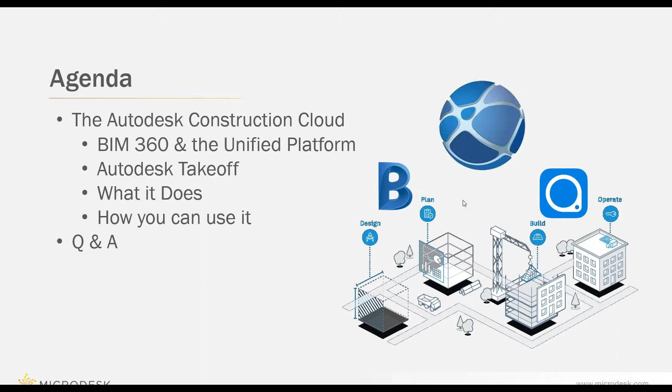Now, in terms of the Autodesk Construction Cloud, that is the overarching title for all of Autodesk's cloud services. So up until about a month or two ago, that was BIM 360, PlanGrid, Building Connected, Assemble, Pype, and the Autodesk Construction Cloud Connect.

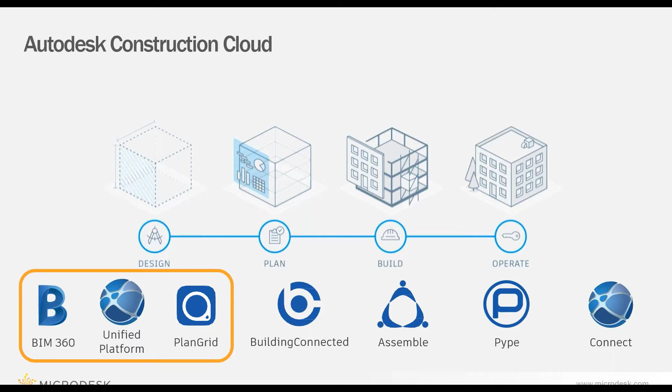Now, last month, Autodesk released the Unified Platform, which is essentially a merger of the main functions of both BIM 360 and PlanGrid. So the idea is we're unifying the different aspects of the construction cloud, rather than having separate tools to do things, to make one thing that covers all the bases.

So you've got BIM 360 Coordinate, which is now Autodesk BIM Collaborate. BIM 360 Design is now referred to as BIM Collaborate Pro. And then you have Build. And then the new one that we're going to be talking about today is Takeoff.

So when we're talking about the Unified Platform, all of these components, similar to BIM 360, have their consistent common data environment. That's going to be the Docs component, our document management, putting our content in a consistent location that's available from just about anywhere. It allows us to do our issues, markups, and file sharing.

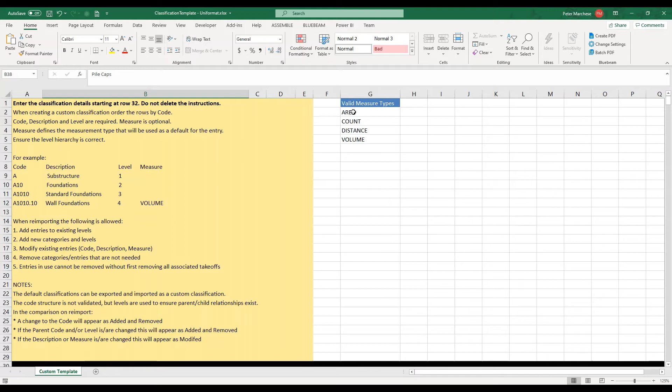This is something I can import via an Excel spreadsheet. In this case, this is the template I started off with from Autodesk. They make it easy to work with. The first part tells you all the information you need to know, how it needs to be formatted, and what information goes where. If you're putting in a specific measurement, this is what you can choose from.

You can basically set this up however you feel. What's the organization you want? Do you want to go CSI, or do you want to go Uniformat? This is up to you. How do I want to break down everything I'll be doing my takeoffs on? Is it a really simple project where I just need five items, or do I want a structure where I can expand a tree out and break it down into various discrete components?

Once I've determined how I want to work on this, I'll upload that here to Autodesk Takeoff. And if I need to track multiple things, I can add an additional classification system to the items that I count. I'll go over more about what this means in a few minutes.

So that's my first thing. I've got all my projects set up. Then I come in here and determine what's my measurement system, and how I'm classifying my data.

Now from there, I need to make sure I actually have data to work with. So I can come over here to my files. This is essentially going to show me the content I was looking at before inside of the Docs component, inside of my document management.

Now for 2D content, I can look at those PDFs I showed you before in my documents folder. So this is my 2D PDF. I can check the box for the content I want, then come over here and say publish to Takeoff sheets and models. That's one way I can take my PDFs already inside of the Autodesk Docs component and bring them straight into my Takeoff.

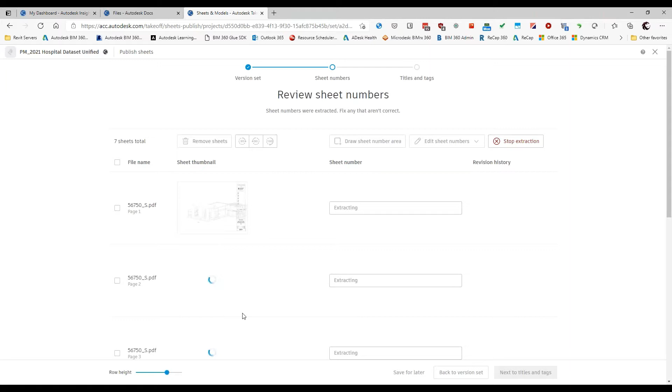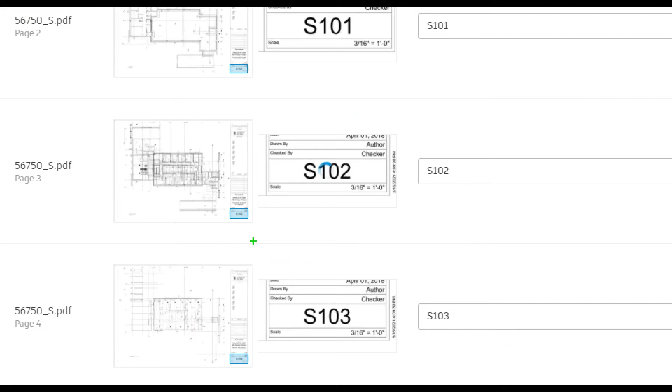Once this is finished, I can look through here and see where it's actually getting the data. All the numbers line up with the examples I have there. Then I'll say I want to go to the next page once it finishes syncing. Then I get to choose, okay, you've got the number, but what about the title? Where's that? You can see this little blue square here that it actually chose automatically. I can go into that title block and draw the box where my title is, and it'll pull that information out for me.

And then from that point, it'll pull in that PDF, and I can start utilizing that for my takeoffs. Now, just to speed things up, I'm going to cancel this for the time being because I've already got some content in there to work with.

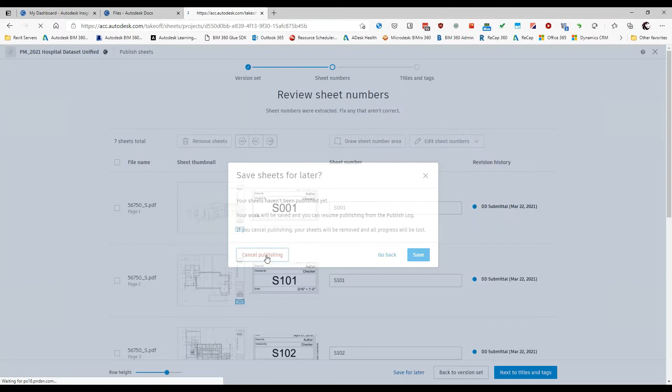So in this case, I've got my sheets and models. Those were sheets that were published from the docs component. Now for my 3D models, I do have to manually upload those. So in that case, what I'll end up doing is I'll download my project from the Construction Cloud, or just upload it from my local files if I'm only working locally.

Once my content is uploaded, I can come over here and now I can create my package. So pretty quickly, go in, do my settings. Am I doing Imperial? What am I classifying things as? Upload your content and then create the package. And that package is essentially how am I going to organize all my data together. So this is my DD review.

And I can see, again, all those views, whether they're 3D or 2D, right here to work with. Now, in this case, I've got a good amount of content. And if I'm trying to figure out, okay, well, where did we leave off? I can always click on my filter and say, you know what, I only want to see 3D views, or maybe only show me my 2D views, or just show me the views that actually have takeoffs already. In this case, I can see that I've already put a takeoff here on my sheet for A102, as well as on some of my models.

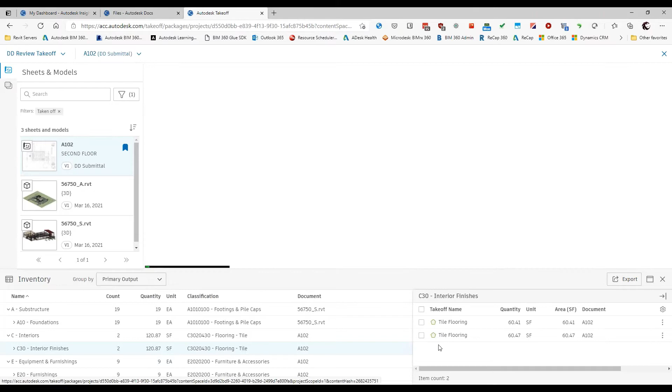On the bottom left-hand corner, I have a little icon here for my inventory. So I can also come through here and see all the things that have already been taken off. And by clicking on elements, I can say, you know what, take me to where that is. So same idea as me coming over here to 102 and clicking on that. I clicked on my tiled flooring, and that opened up the view and took me right to where that tile flooring is. So I've got a couple of ways to filter my views and make sure I'm finding what it is that I'm looking for.

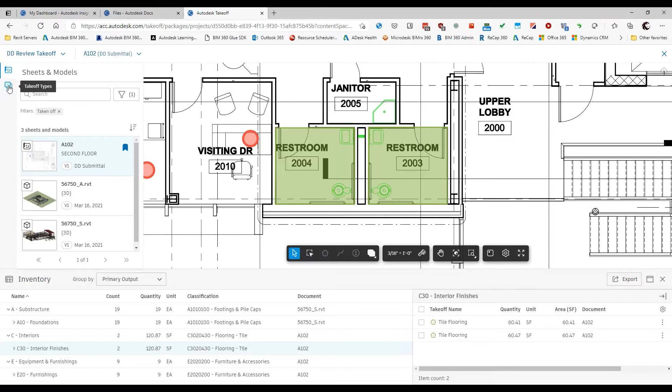So now that I've got my view set up, I can see where I am. I'm just going to turn off my mini map for a minute. I'm going to come over here and I'm going to change my view on the upper left-hand corner to my takeoff types. So rather than looking at my views, I want to look at what's currently taken off. And at this point, I've got a few things. I've got my office desk and my tile flooring.

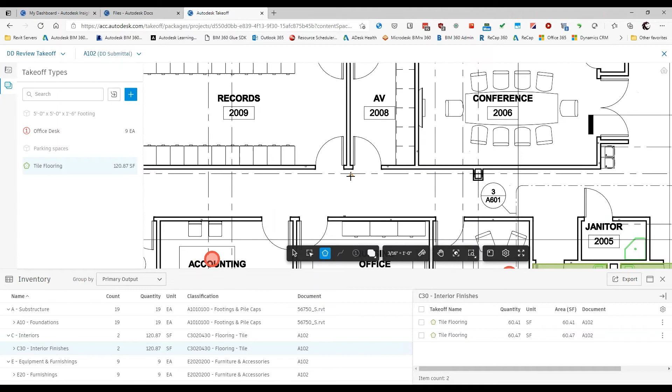Now, if I click on my tile flooring, what that's actually doing is it's allowing me to create more of this specific thing. It automatically went down here to creating areas. So let's say I realize that, you know what, we need to put tile flooring in the janitor's closet too. So this is actually going to snap to the corners. And as I'm adding that, my numbers are growing up. I'm seeing that there's more content that's in here. So I can keep adding more things.

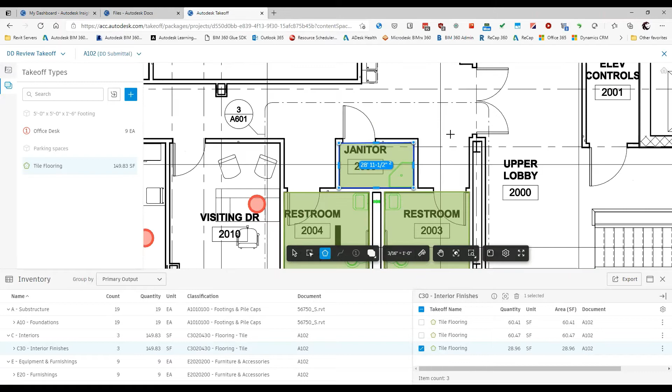Now, if what I need to do is I realize that, oh, I made a change to something, I need to start counting more things. Perfect, go to my office desk. Just keep clicking. If I realize, oh, yep, nope, that's actually wrong, I got to fix that. Nothing here is locked in stone. I can always click on it. I can move them. I can remove them one at a time. I can also come over here and actually find those elements and make changes.

So let me go to my furnishings. I can see as each one of these I select, it highlights it. I'm just going to grab a couple of these and tell it that, yeah, you know what, those ones are extra, I don't need that. So I can make modifications and delete them as need be.

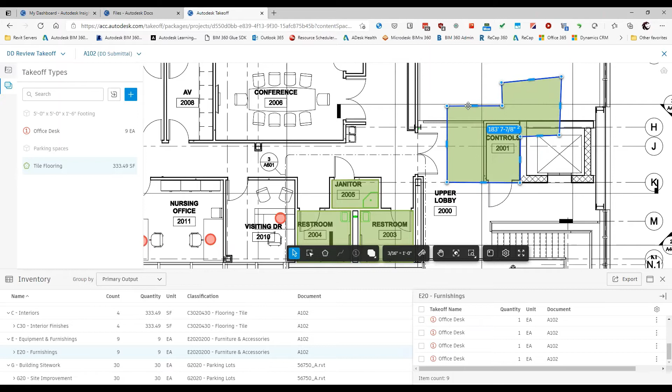The other thing I can do is, let's say that I have something like this where I want to actually have an opening in it, or I need to have some weird shapes. So let's say I have this here, and then I have another one that overlaps it. So this makes it very easy. I can actually select multiple elements and tell it that I want to combine those. I can always come in here and actually manipulate them after the fact. If I have a dot there that I don't need, I can actually remove the vertex. Same idea, let's say that I want to actually get rid of the space here. And I can apply that as a cutout.

There we go. And essentially, that will actually cut that space out. And the other thing I can do is if I realize that I don't want that to actually be an opening anymore, I want it to be filled in.

You can right click on it and remove it as well. So you have several items in there that you can modify as need be. You're not locked into any one thing. You can tweak it, remove it, edit it as need be, so you have a lot of flexibility in terms of how you do your markups.

Now I'm working with a markup that already exists, so what I'm actually going to do is create a brand new one. I'm going to go over here, hit the plus symbol. That allows me to create a brand new takeoff type. So I'm going to come over here and say fire rated wall.

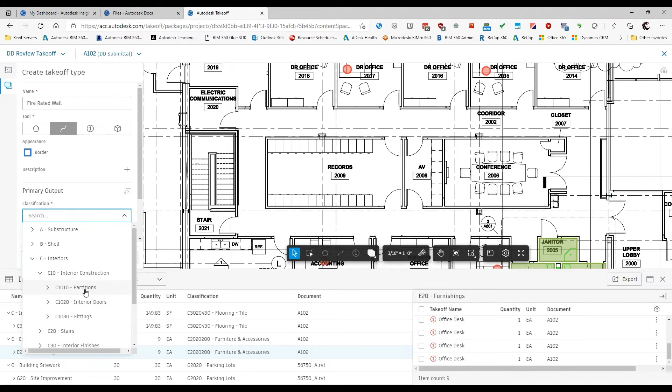And I'm going to do that based on line. I can make changes to my appearance - how do I want this to actually look? I'm going to choose where I want this to actually be organized, so I'll say that's going to be interiors, interior construction. I'll say partitions. How do I want that output to be counted? I'll say linear feet. Start that takeoff.

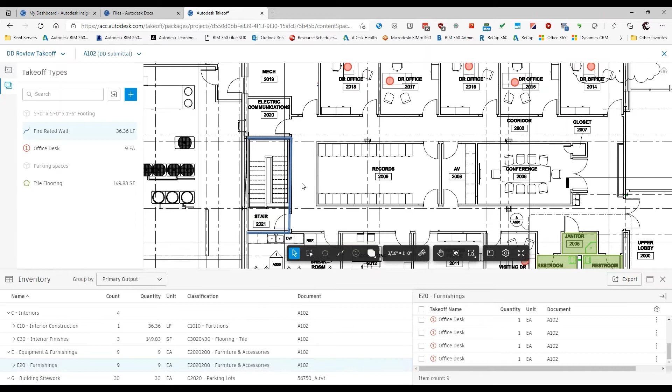And then I can sit here and trace my walls. Again, didn't really draw that clean, so let me come over here and modify that as need be. And I can see that as I'm drawing these lines, that number is actually going up. So I can keep making modifications, tweaking how things work, making changes as need be.

Now let's say when I did this, I actually made a mistake. I can always come in here and make some changes. So if that wasn't the right thing, maybe I started off as count - I can see that now my interior construction is just a count of 2. Well, I'll make a change - that really meant to be linear feet, or meant to be in a different folder. So you're not locked in from that initial choice. I can come back and make changes to the color, as well as to the organization of this.

Now, let's say that in addition to counting this as a wall, I also wanted to count it as something else. What I can do is use that secondary output. So when I was creating what the actual organization was going to be, I'm using UniFormat in this case - I could have added a second organization, and that's where I can actually set this up.

You also have the ability to create formulas. So if I'm measuring something and I want to calculate - I'm using 2D drawings, but I'm looking for volume - in that case I can start saying I want the output to be in volume, but I want the formula to take the length and multiply that by a height and a thickness. So I can put in the math needed to generate the numbers I'm actually looking for.

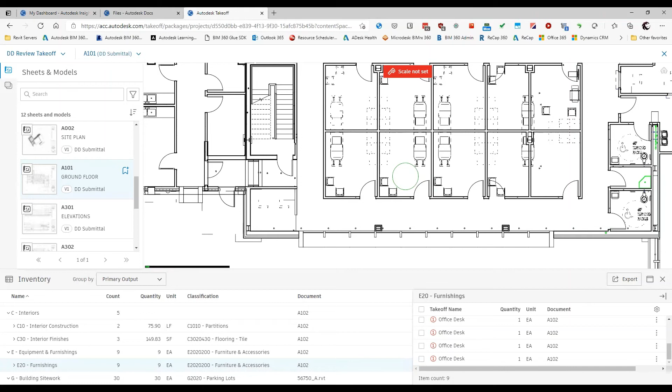Now, you might be wondering, okay, how does this understand what I'm working with? How is it actually able to get these kinds of numbers? Well, the easy thing is, if I get rid of my filter and just grab one of my 2D views, the first thing it needs me to do is actually set the scale of my view. As I'm working with the 2D view, it doesn't necessarily understand what my distances are. So the first step is to come down here and say that from there to there is, in this case, 3 feet.

Set that calibration. Now it tells me what the actual scale is. So if I already knew it to begin with, I can double check it down here. And now I can come down and say, okay, let's start working.

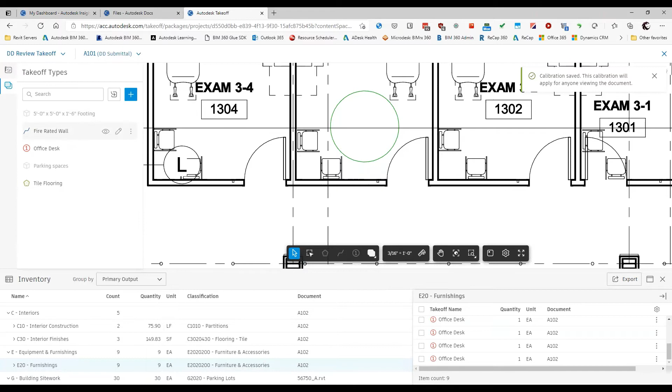So do I want to start doing more tile flooring? Do I want to start using more fire-rated wall, the office desk? I can take advantage of the organization or the different kinds of takeoffs I've already set up, and then start applying them to as many different views as I want. So I don't have to rebuild this every single time I go into another view and start making changes.

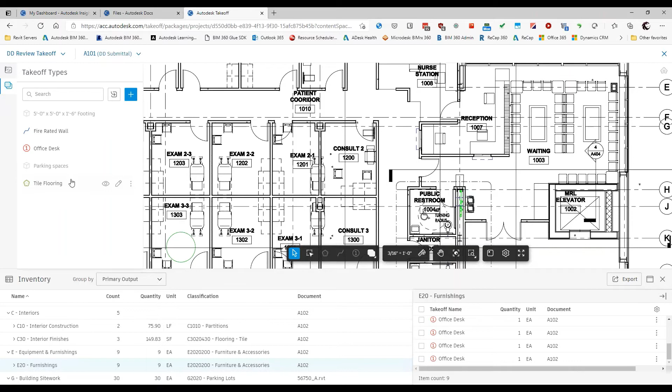So this is how I can take advantage of Takeoff for my 2D views. And again, if anybody has any questions, feel free to drop those into the questions window. Just keeping an eye on there just in case anything pops up.

So I'm going to hop back up here to my sheets and models. Now, up until this point, I've been doing 2D work, which is pretty simple - you click on it, you trace it, you draw what you want. But it's relying on me as a user to interpret the 2D drawing and trace it and assign it correctly. So what I'm actually going to do is go to one of my other views here - the easy thing for me to do is grab my structural model.

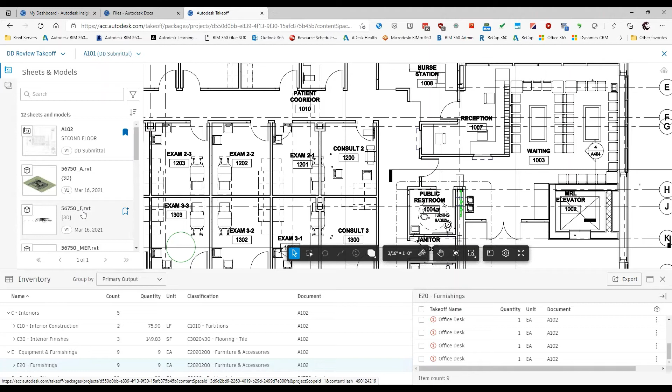And now I can see all the content that's in here. You might notice that a few things look like they have weird colors, and I'm going to get to that in just a minute.

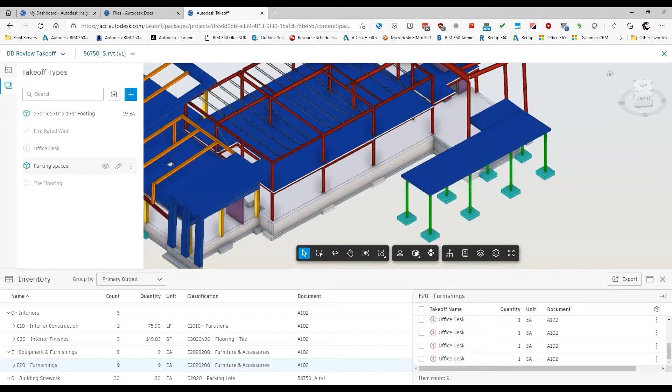Now in this case, I've got some footings that I've taken off, and I've also been counting my parking spaces. Now let's say what I'm really looking for is my columns. So I can click on a column here, and I'm going to say I want to actually count that. I'll hit the plus symbol.

Because I'm selecting an object, it understands what that object is and automatically adds that to the name. So this is going to be looking for W12 by 40. I can choose what color I want it to be, and if I want to, I can also put a description in here.

So Kevin, that question you just asked about inputting what type of wall - if I want to put that data into my takeoff, I can easily put it in either the name or the description. Or if I want to go to that level of detail, I can just make sure my organization down here actually has that.

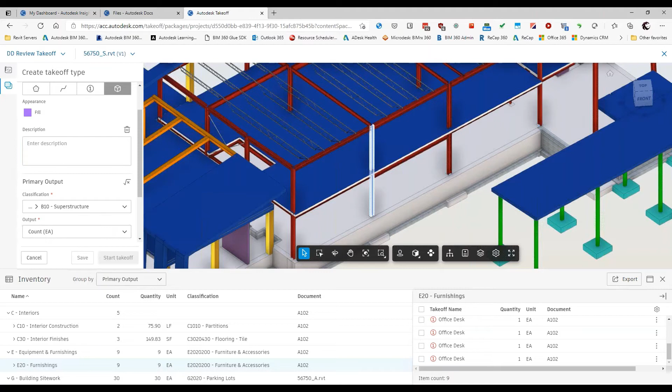So I'm saying superstructure, and I want to say count to start with. I'll say start takeoff. Now in this case, it just sees the 1, but I can easily add all of these by just saying select all. I just grabbed all of that. I can see that currently there's 30 of them, and I hit the check mark. Now I've just counted all of those elements, and those are now part of my takeoff.

Now, the first question that usually comes up is, well, how are you sure you got all of them? I mean, yeah, you right-clicked on it, but is there a way to tell? So an easy way to do that is I'm going to come over here and say form clusters.

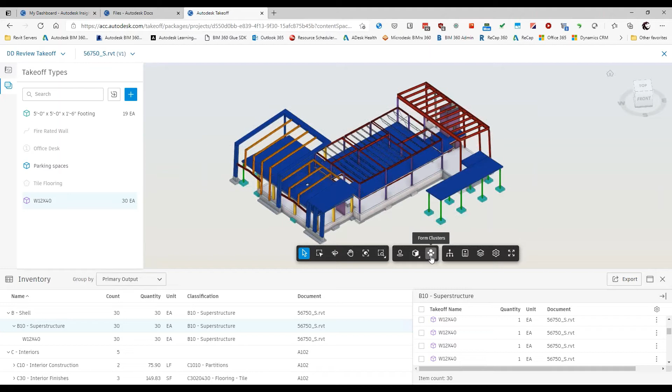Now, if anyone's ever used some different viewers that Autodesk had that worked with Forge as examples of how you could utilize the viewer, you might have seen this. But essentially what it does is it takes all the elements of my project and breaks them apart into different piles. If you've ever heard of knolling, it's almost like that.

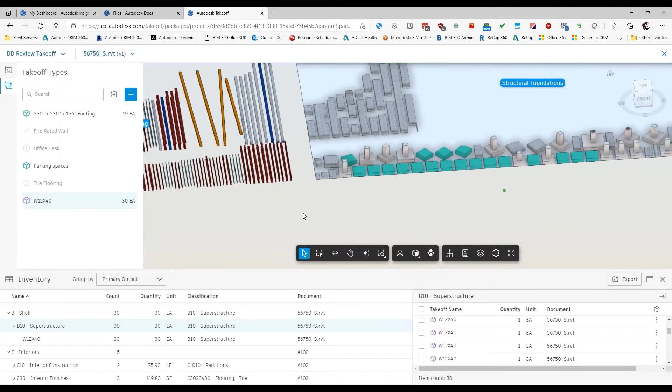But here I can see those footings that were different colors - all of these green ones have been counted already. So when I chose this, you notice how I chose purple as the color for my column. These guys here were that green color. So it's an easy way for me to look at all of my elements and see what is and what isn't counted yet. I can see that all of these columns have been selected, but not the others. Basically because when I selected it, it grabbed all of that specific type of column, the W12. Not good, not bad, just that's what I chose.

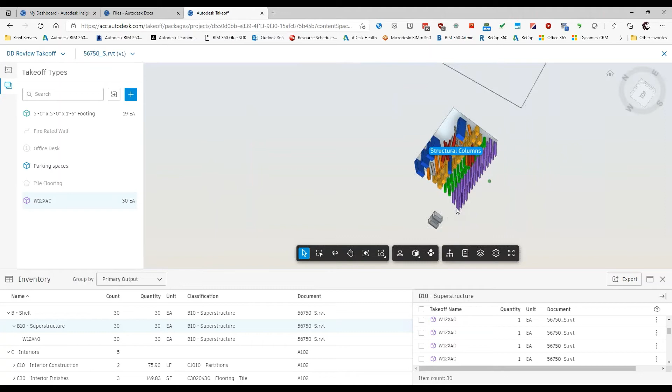Now let's say what I'm trying to do is I want to grab all of something. There's a couple of ways that I can easily do this. Let's say I want to grab all of my structural columns at once and make one big one. Well, I'm looking at the view right now, so easy thing to do, let's do a big window. I've now just grabbed all of my structural columns.

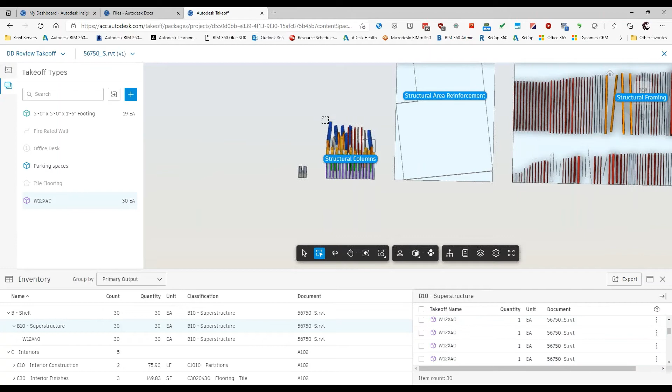So if my intent really is to not rely on that right click and only grab it by that same type, but I want to grab it more by the category, I can come to this view and just do a window select. Now I've selected all of those, and if that's indeed what I really want, I check the box, and now I've got all of my columns taken off. Now, in reality, this probably is not how I would actually be counting all my columns, but it's an example. So I'm going to bring this back to normal.

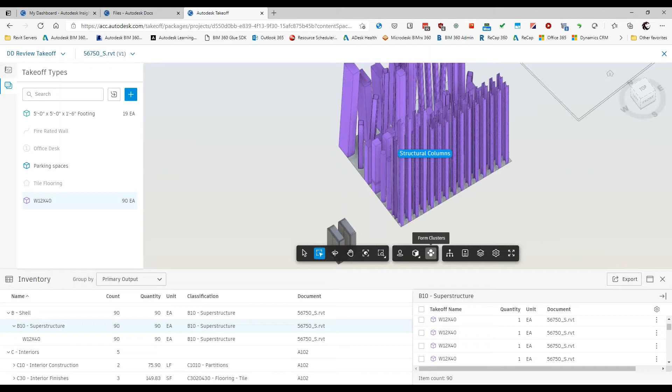Yeah, let's see. Now, a couple of other things that I can do here.

I showed two ways that I can grab certain elements. I can right-click on it and take it to that group. You still have the other ways of selecting or modifying things in your view, as you would for the normal cloud viewer, so I can select items and see my properties. But what I can also do is go to my model viewer, so in this case if I select an element, it takes me right to where that is in that viewer.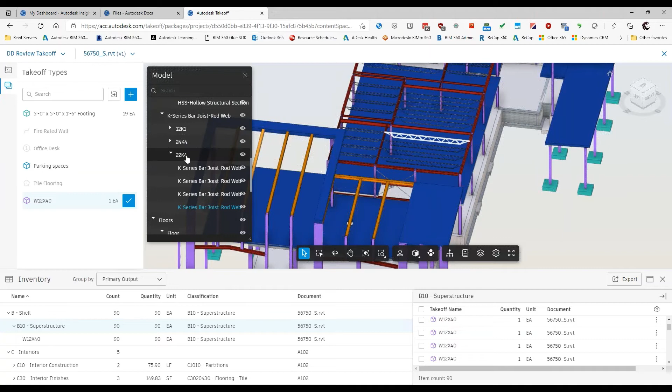Let's say what I really want to do is a count of all of my joists. I grab a joist and that takes me here, and then I just start going upstream. Do I want to grab all of the joists of that specific type, or all of my K-rod joists? This view is great because it filters my view—it's essentially only selecting those elements. So if what I want to do is grab all of those, same idea, the window select just grabbed everything there.

I'm going to say I want to do a new takeoff—K-series joists. Start takeoff, check the box, and they're now all counted. So a couple of easy ways for me to go through and grab all of the elements from my project, and make sure that I can actually see everything that I need.

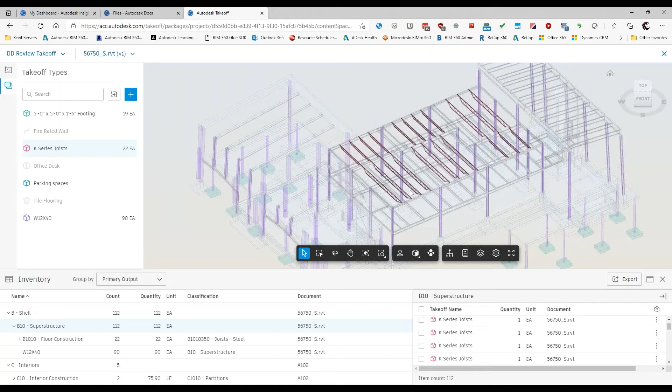Gotcha. Okay, so these are a couple of things that I can do within the view. Now on my sheet, I can see a lot of the inventory. It's not too bad—I can group it by the output, the document, or even the takeoff type. So if I don't want to have to navigate through that big list, I can simplify it a little bit.

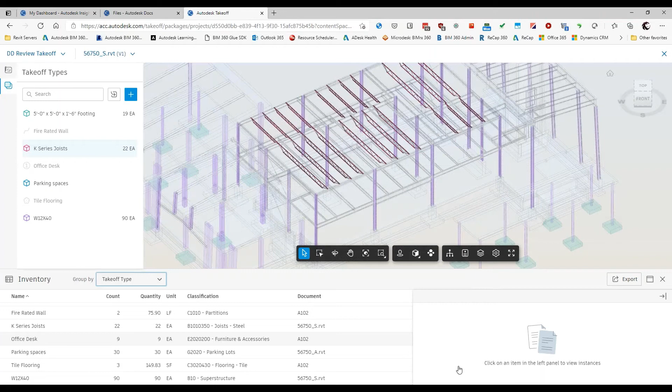But let's say that I'm not working on a laptop—I have multiple monitors. Well, an easy thing for me to do here is to say that I want to actually break this out and put it on another screen. So take advantage of all the screen real estate that you actually have. Make sure that I'm looking at the model in the biggest view possible, and then looking at the information from that model in the best way possible.

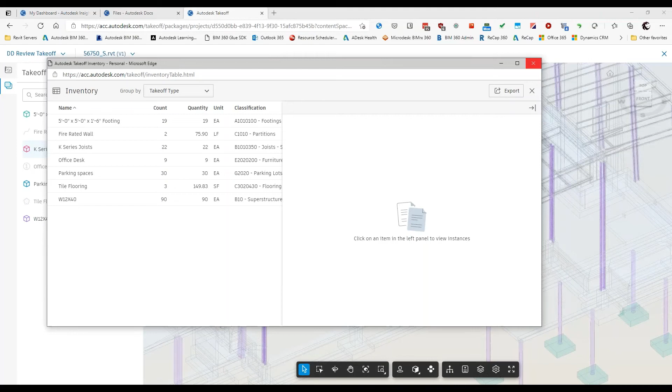And then when I'm ready to actually go back to work, or to get rid of this, all I have to do is close this view again, and that puts it right back where it was. If I want to actually turn this view off, just hit the little X. I can easily bring it back by just clicking on that. So there's a lot of different ways for me to go about navigating and viewing the content, and making sure that everything shows up the way that I need it to.

So, easy ways for me to track what I'm doing. I'm going to hop back to my home page for one second.

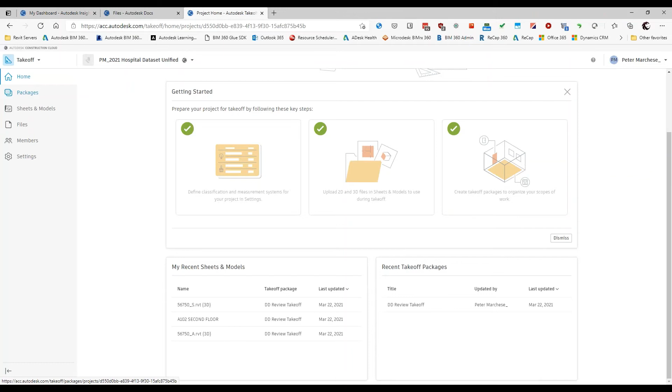So when I first go to the home portion of Takeoff, you've got your basic getting started that explains what you have to do to set things up. I've got my recent sheets and models, so I can tell everything that's been worked on, and my recent Takeoff packages. Now if I want to take the data that I've built from here and actually start working on that elsewhere, I can go into my packages, select the package that you're working with, and then go down here to my data, and I've got export.

Now, what export is going to do is take all the information that you actually have in the inventory, all the things that I've been working on or taking off, and that'll export that out to an Excel spreadsheet, and you'll see the organization that you've got set up. So even though I have that really big Excel spreadsheet that had all the information, it's only sending me out the information that I've already filled in, things that I'm working with.

I can see the count, the quantity. Now keep in mind here, the quantity might not always be the same as the count—that depends on if I'm running a formula or what the formatting is for what I'm choosing. The code that it's assigned, the description within the code, and then what document I'm actually counting that from—where am I getting that number from? So this allows me to take that and work with it in Power BI, Excel spreadsheet, tie it into other tools that might have costing information, and then keep moving forward with that.

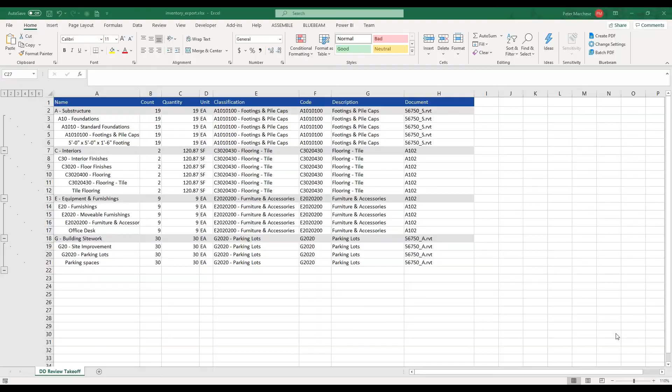The first question that typically comes up is, how do I know what happens if something changes? Well, the easy thing with this is that if you have an update, you're going to get a notification. So if you see a model that has been changed, you'll see a little warning symbol next to the version, giving you a heads up.

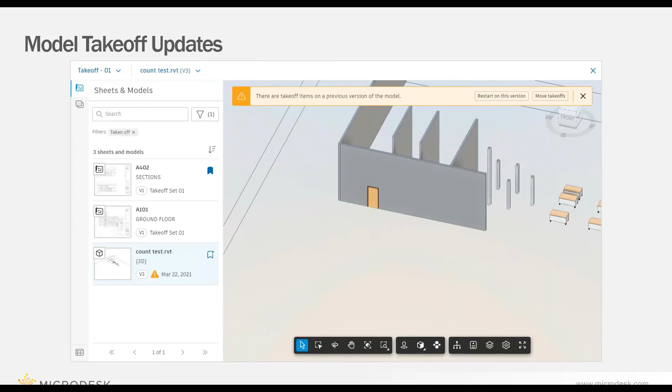Now that gives me two options, restart or move. Basically that means you have two ways to look at this. If you choose to restart, you're not losing the takeoff types, but I would have to reapply them to what I've worked with. So if it's a model, I would go in and right-click, select all, or do the window selects.

If I do the move takeoff, what that's going to do is take the content I was already counting. Everything is intelligent with the model, coming from Revit with element IDs, so it just moves it to that new version of the element ID and adjusts the count it previously had. Any new items I would still have to take off, but all of the existing content would be moved and adjusted as per the changes in that model. So it gives me a good amount of flexibility and makes it easy to work with.

Cool. So a couple of questions.

Question: is there any way to automate based on assigned materials in Revit and output per floor, per building, etc.? At this point, there's no automation built into it outside of me going through and selecting elements to add them. There's still that manual process of either drawing on the 2D or selecting the 3D and then adding that to the count, at least at the moment.

Another question: when you upload a PDF drawing set, does it remember the order of the sheets? It's looking at the order based on the setup you do from that sheet export. So when I start tagging elements or pulling the data out, that sets it up. It's not necessarily looking at the order in the PDF, but the order that you can set up.

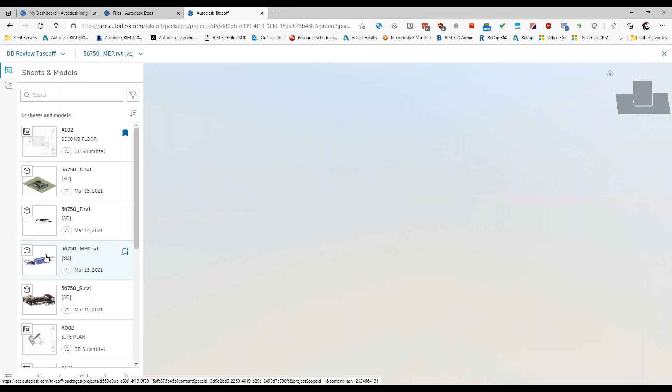Another one: will this work on an engineer's MEP model? Yep, as long as it's a model in the format that the Takeoff can take advantage of, yes. So in this case, I'm looking at a MEP model.

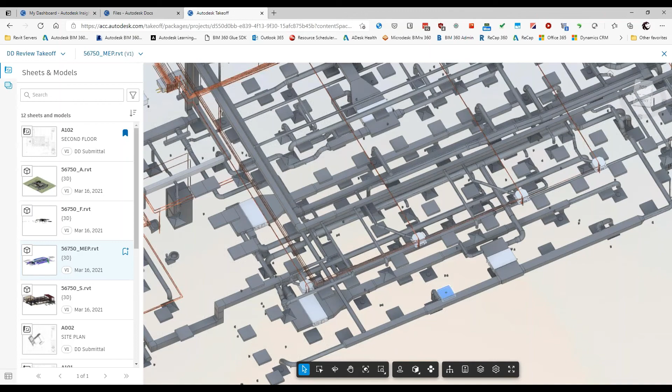If I wanted to go through here and grab all of whatever, go. So I can select all those elements. I can go through and actually create my takeoffs from that. If I wanted to grab all the items that I need, just the same way as I did for the structure.

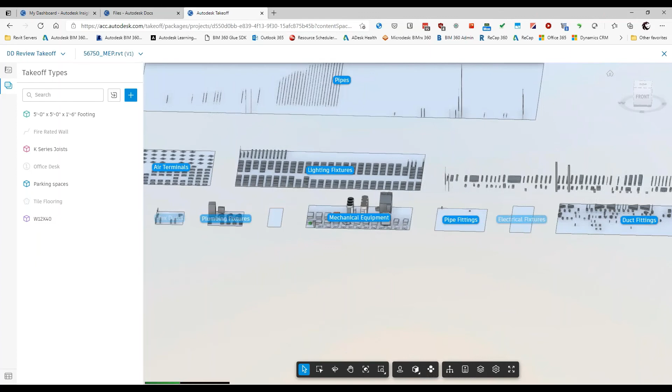And I also have the ability to explode this out, which makes it very easy if I'm trying to go through certain things like lighting devices. So if I want to make sure I'm counting all of my switches at once, I grab them there, do a big window, spell it correctly, and then go through and assign it to the correct thing.

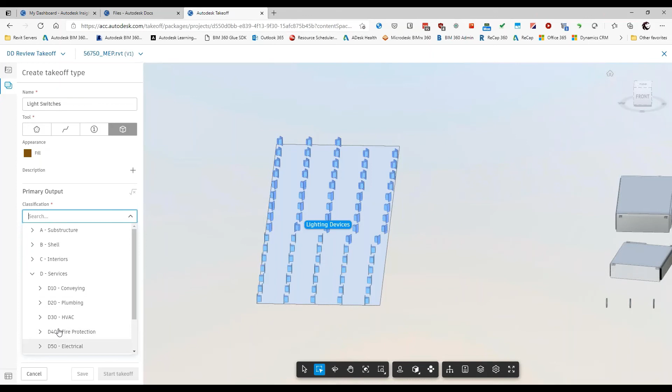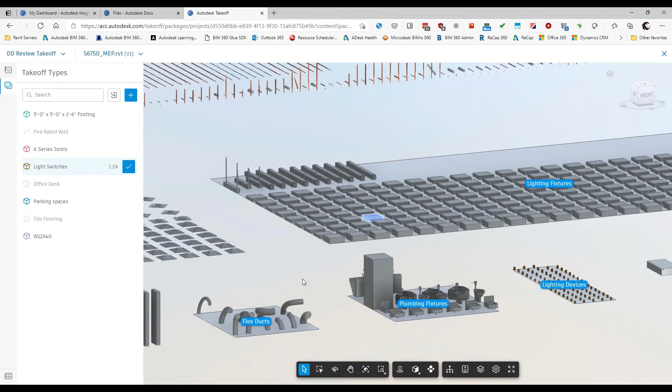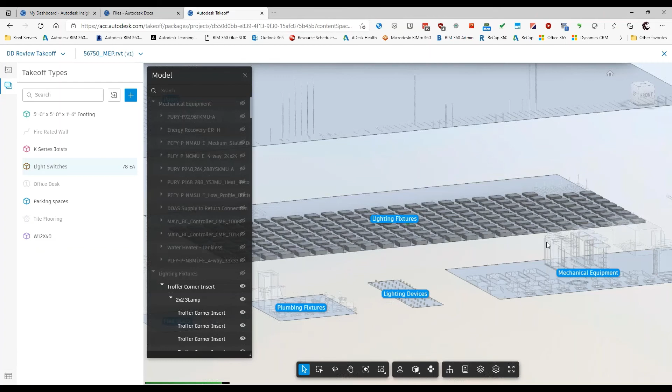As long as that model is a Revit file and things are organized correctly, it makes it very easy for me to grab. Just like before, I can select items based on the type, do a window select, or grab based on the kind of element it is—I just want to grab all the 2x2s. You can also search, thankfully. Then I can do a nice big window and grab all of my troffers at once. So there are a couple of ways to select content, manage it, and set it up to get an accurate takeoff of the elements of my project.

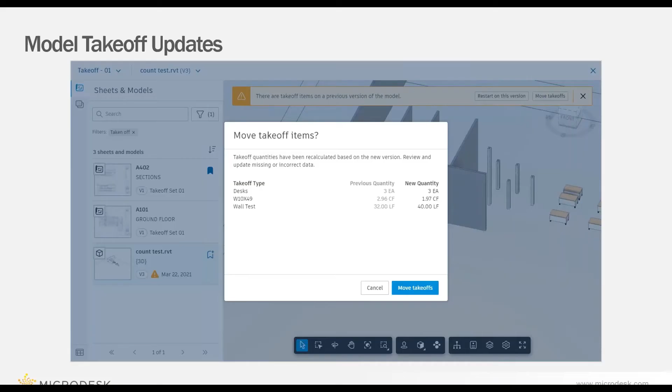Now, a couple of important things to understand with the Takeoff. When we worked with BIM 360, typically everybody not using BIM 360 Design had a license assigned from the hub owner. With the unified platform, which Takeoff is part of, it's bring your own—meaning I can use my own license for Autodesk Takeoff on anyone else's project that they invite me to. They don't actually have to provide me with a license unless I don't have one or they want to. So it makes it easier to collaborate with people because you're no longer giving them one of your own seats.

Now, with regards to getting access to this, certain aspects of the unified platform come automatically. If you own the AEC collection, you've already got Docs. If you already had BIM 360 Design, you've been upgraded to BIM Collaborate Pro, so now you actually have the Clash features. Coordinate will be automatically changing to Collaborate upon the renewal.

But if you already own Assemble, you can actually request, and based on which version of Assemble you have, you can get a couple of seats of Autodesk Takeoff. So you might already have access to this—you just have to reach out and let us know, and we can put in a ticket for you to get access to Takeoff based on your Assemble purchases.

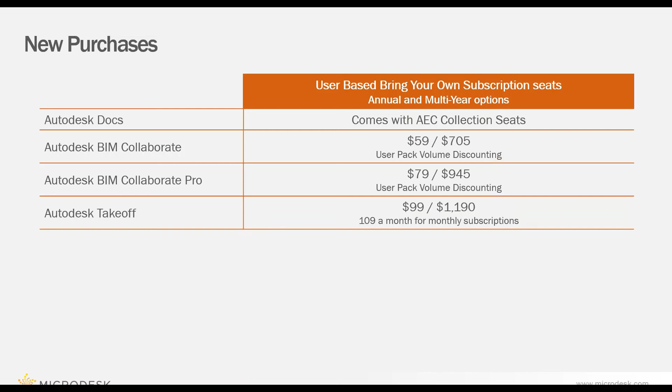And if you don't have any of these, Docs again comes with the collection. BIM Collaborate and Collaborate Pro are purchased the same way as Design and Coordinate used to be—there's volume pack licensing. Takeoff is about $100 a month if you look at the actual subscription price; if you're getting it monthly, though, it's $109. Build is priced very similar to how PlanGrid was.

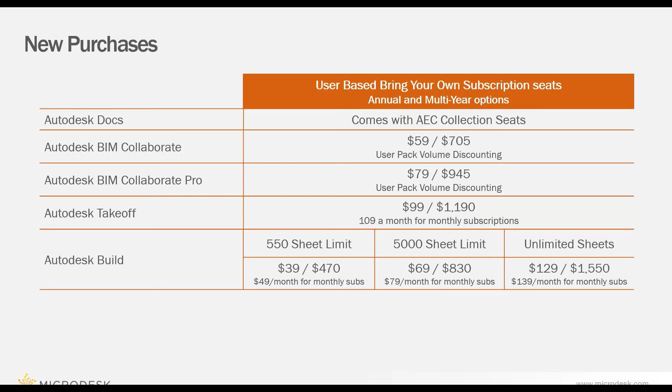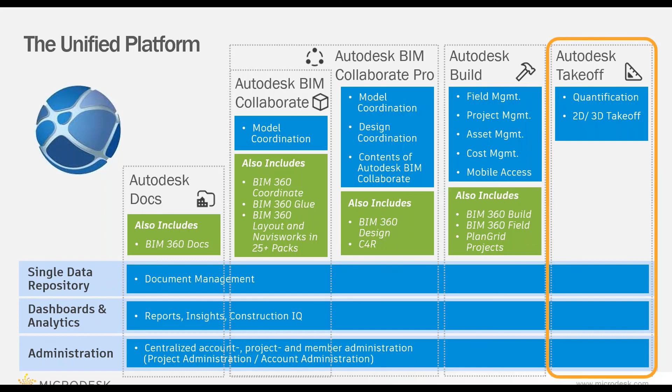And as I think we showed, it's really user-friendly and easy to get into. You create your organization with how you want to take it off, and you can either start tracing or selecting objects, and it does it for you. From that point, you can export out to Excel and put it in with other tools you're currently working with to do your estimates or track the changes from version to version—you can see how those numbers adjust.

So any new questions? Take a look here.

Question: does this work with Assemble? As of right now, there's no direct workflow with Assemble. They do have a good amount of overlap in terms of the quantifications, but they also serve different workflows. Assemble is purely 3D, while this works with 3D and 2D—a little bit more similar to Navisworks in some respects.